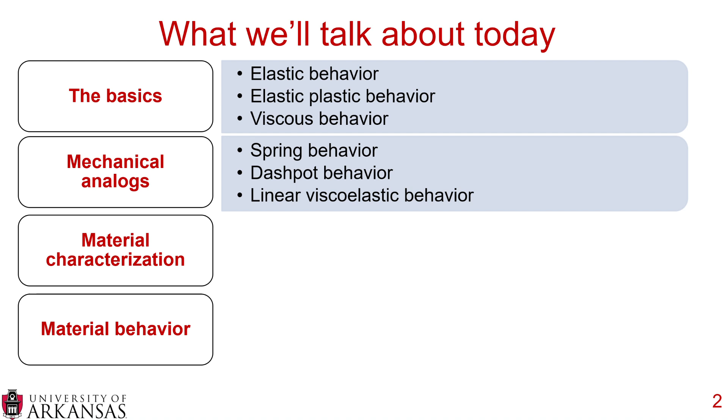My name is Andrew Bram, and today we'll be talking about viscoelasticity and asphalt materials. We're going to start with some basics, including elastic behavior, elastic plastic behavior, and viscous behavior. We're then going to transition into spring behavior and dashpot behavior, which are mechanical analogues, and we'll combine various springs and dashpots to explore linear viscoelastic behavior.

Now, this topic can easily be a 2 to 3 day workshop, and this will be a long Pavinar. Usually these are about 30 to 40 minutes. I anticipate this one being 50 to 60 minutes, but I'm only going to scratch the surface, so I will provide some additional materials at the end, but I'm just going to cover the basics in this Pavinar.

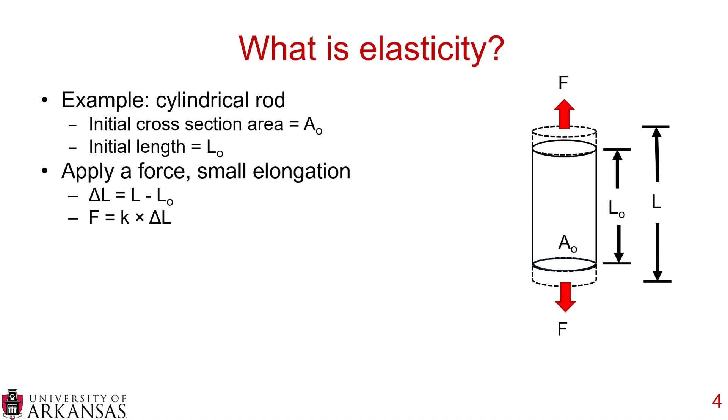Then let's apply a force, and we get a small elongation. So we get a delta L, which is L minus L0, and the force we applied is K times delta L. That K is a function of material and geometry, specifically the modulus of elasticity. So we can substitute into K E times A0, so we have the force equaling E, the modulus of elasticity, times A0 times delta L over L0.

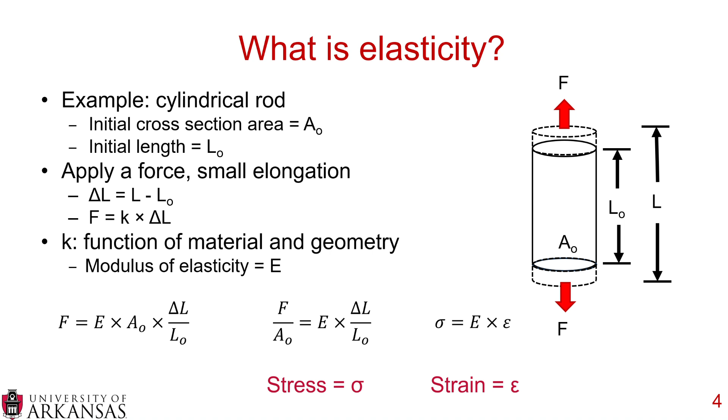And we can rearrange that equation. We can take the area over to the left side, and then you can clearly see where the stress equals E times the strain, where sigma equals E times epsilon. So this is a fundamental elasticity theory.

Now we can also take a look at it in graphs. A linear elastic material is where you load something with some sort of stress. You measure the strain. When you unload it, it returns on the same path in a linear fashion. So you can just go back and forth, up and down. That's a linear elastic material.

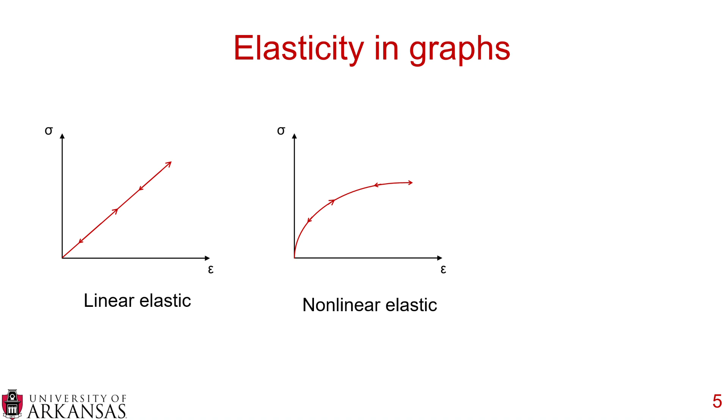You have nonlinear elastic materials where, again, you apply some sort of stress and you measure a strain. It tracks on the same path going up and down, but it's not a straight line. So it's a nonlinear elastic material.

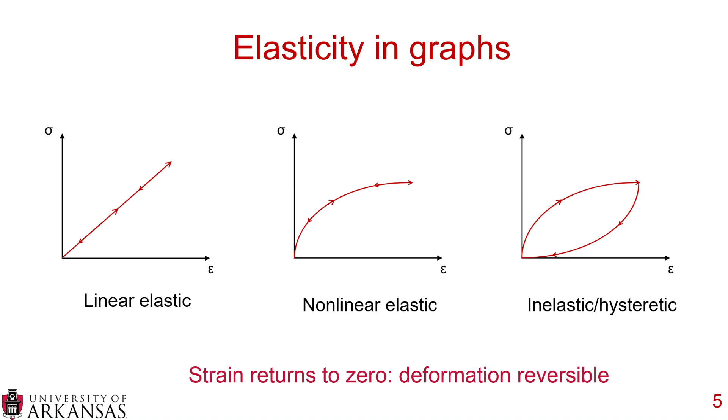And then we have a concept called inelastic or hysteresis, where you load it on one path, it unloads on the other path. But the most important thing to notice here, in elasticity, the strain always returns to zero. Any sort of deformation that you put on the sample goes back after you've taken the load off. So all of the strains start at zero, and they all return to zero at the end.

Now, when we incorporate plasticity into this, this means we apply some sort of strain, but then it does not return to zero. So you have a perfectly plastic material where it returns back to a stress of zero along the same slope as the loading that was applied. Or you have something called strain hardening, where there's some sort of kink in that loading cycle, but then again, you return back at the same slope, but there is some sort of permanent strain. And so here with an elastic plastic material, you introduce some deformation, and that deformation is irreversible.

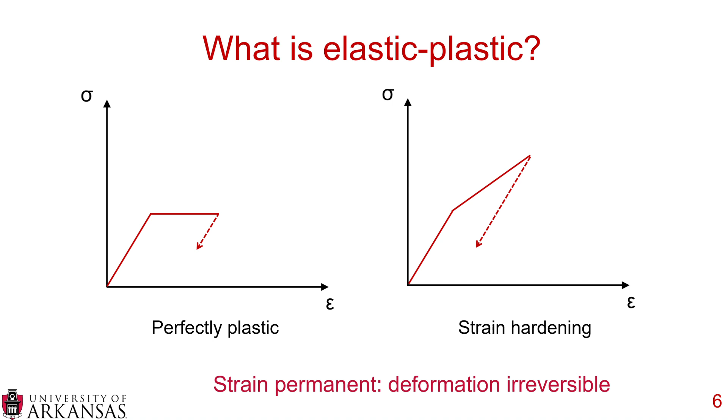Now with viscosity, the easiest way to quantify it is to pretend you have two parallel plates, and between those plates you have a purely viscous fluid. The plates have an area of small a, and you apply a force so the top plate moves at a constant velocity. That velocity is represented here, zero at the bottom and maximum at the top, showing a linear relationship in this viscous fluid.

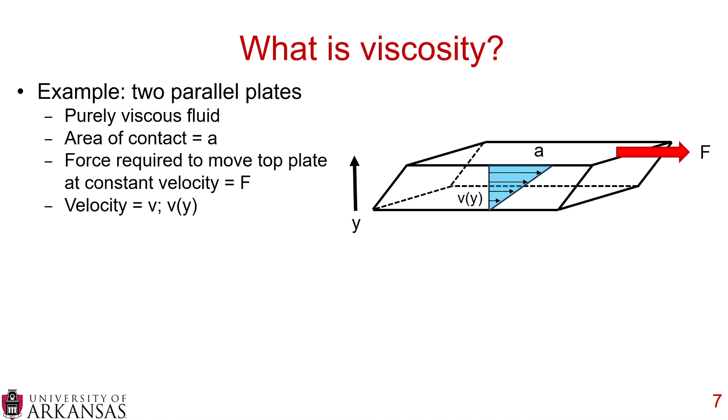There is a coefficient of shear viscosity, eta, and the force equals eta times A times the change in velocity over the change in height. That's a fundamental principle correlating the deformation to the force.

The strain rate is epsilon dot, which is d epsilon over dt, and that equals dv over dy. So you can replace that into our equation and divide by A: F divided by A equals eta times dv over dy. Substituting in epsilon dot, you get stress equals the coefficient of shear viscosity times epsilon dot. So that's how we get the equations behind viscosity.

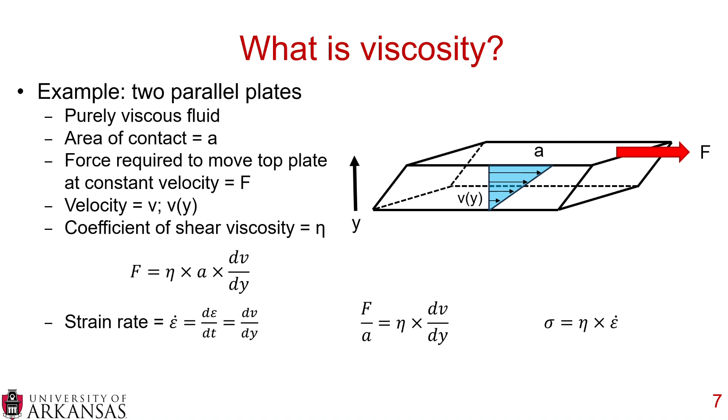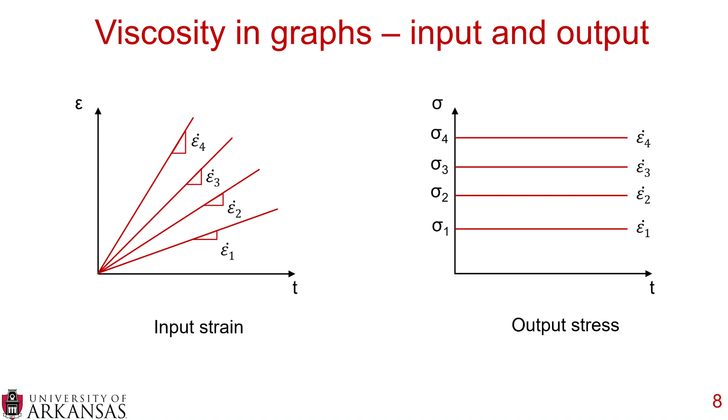Now let's take a look at that in graphical form. Pretend you have 4 different input strains, epsilon 1 through epsilon 4, or epsilon dot 1 through epsilon dot 4. From those 4 strains you get 4 different stresses, so you have an input strain and an output stress. You can cross plot the stress and the strain, with stress on the y-axis and strain on the x-axis, and you can see the 4 levels of stress corresponding to the 4 levels of strain.

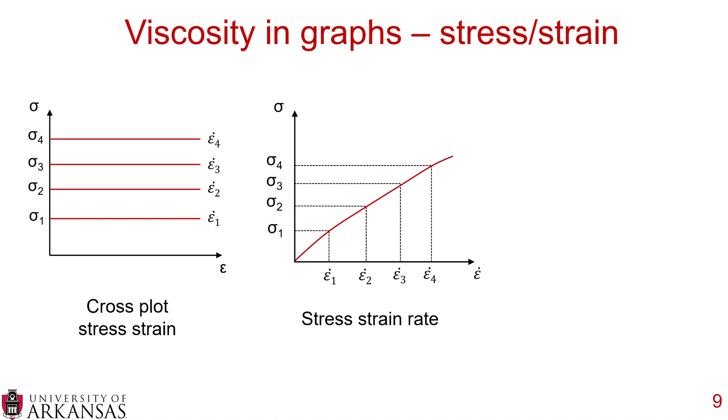Then you can plot the stress by the strain rate, epsilon dot, on the x-axis. You can see this happens to be a non-linear example: as the stress increases, the change in stress decreases, so it's nonlinear. But there is a special situation where if you have a linear relationship, meaning your eta is constant, this is what we call Newtonian behavior.

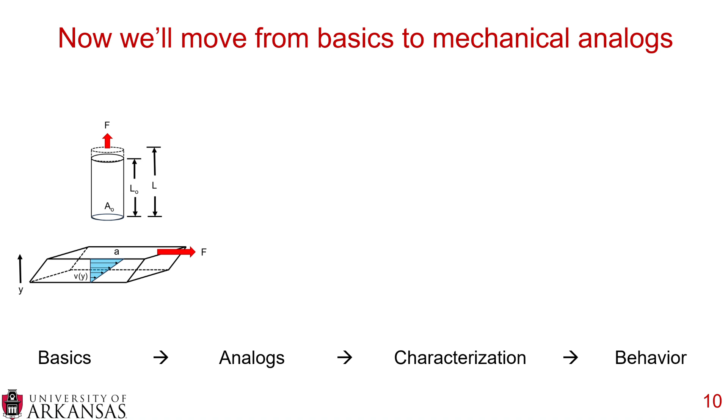So that is the basics of elasticity, elastic plastic behavior, and viscosity. Let's start taking a look at the mechanical analogues. We're going to look at creep versus relaxation, springs and dashpots, and then go into linear viscoelasticity.

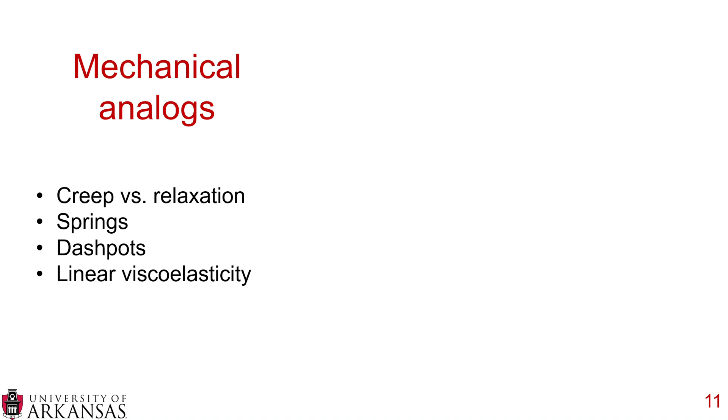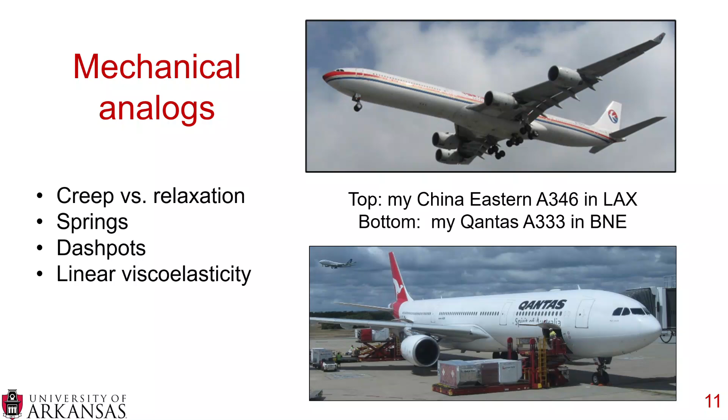Now back to the mechanical analogues, let's talk about creep versus relaxation, and we'll go into springs and dashpots and finish up with linear viscoelasticity.

When we think about a creep test, you have a constant stress and you measure the strain. This is called stress control. Over time, you apply some constant stress and see what happens to your material. In viscoelasticity, we relate this with creep compliance, which is the change in strain over time divided by that initial stress. You apply an initial stress, your strain starts increasing, and it's asymptotical, approaching a maximum value.

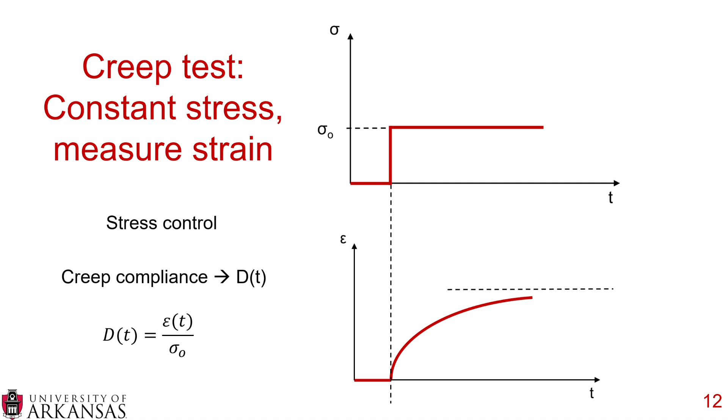So this is the creep test: constant stress, measure strain. The relaxation test, on the other hand, is a constant strain, and you measure the stress. This is called strain control. You apply a constant strain to your sample, then measure the stress. This is related to relaxation modulus, or E of T, which is the stress over time divided by that initial strain. When you apply that strain, there's a jump in stress, and as you continue applying the strain at a constant rate, the stress relaxes, hence why it's called a relaxation modulus.

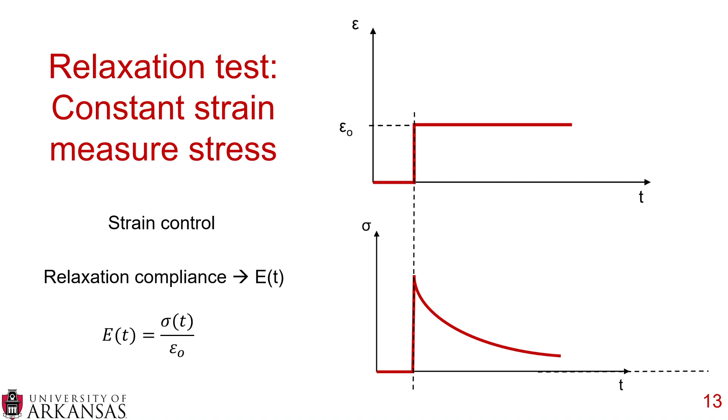Now, if you know about viscoelasticity, you also know it's often represented with mechanical analogues. Let's look at these concepts through that lens, starting with the spring. A single spring has some elastic modulus, which can be either in pounds per square inch or newtons per square meter.

In creep and recovery tests, you apply some sort of constant stress, and then you take that stress off. You measure the resulting strain, and when you take the stress off, the strain returns back to zero. So with a spring, the two curves look the same when we're talking about creep and recovery.

For relaxation, it's a little different. You apply some sort of constant strain, and the resulting stress is also constant. So there's a fundamental difference between creep and relaxation. With creep, you apply a stress, measure the strain, and when the stress is released, the strain goes to zero. But in relaxation, applying a constant strain results in a constant stress being recorded. This is a spring mechanical analog.

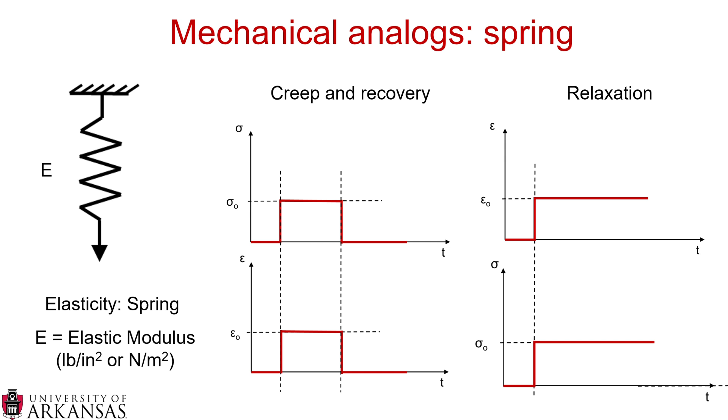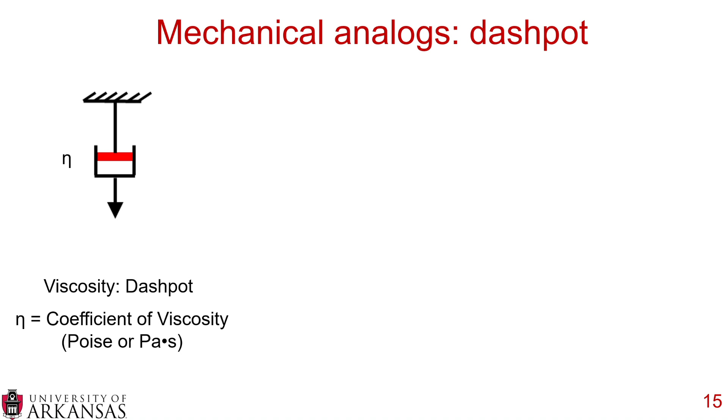The next most common is a dashpot mechanical analog, and this measures the viscosity of a material, represented by eta, the coefficient of viscosity, measured in poise or Pascal seconds. So again, let's pretend we do a creep and recovery test. You put some sort of constant stress on, apply it for a certain amount of time, and then release it back to zero.

Well, the strain looks a little different. You can see that the increase in strain is simply the applied stress divided by eta, but then when you remove the stress, the strain stays on, so it does not decrease again.

With relaxation, you apply some sort of constant strain at some time, and it's a very interesting response. Essentially the stress goes to infinity immediately, but then immediately drops down to zero. So you've essentially maxed out that dashpot by putting the maximum stress on, and then no matter how much more strain you put on, your stress will be zero.

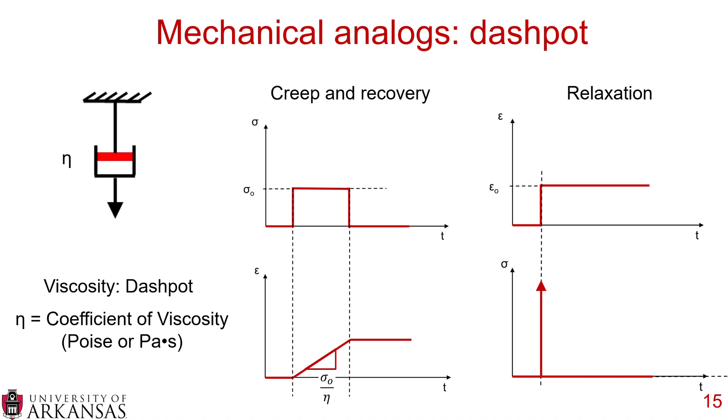Now it's not very convenient to have just a single spring or dashpot, so we put these together. For linear viscoelastic behavior, we have what's called the Maxwell model, where you have one spring and one dashpot in series. You either apply some sort of stress or some sort of strain.

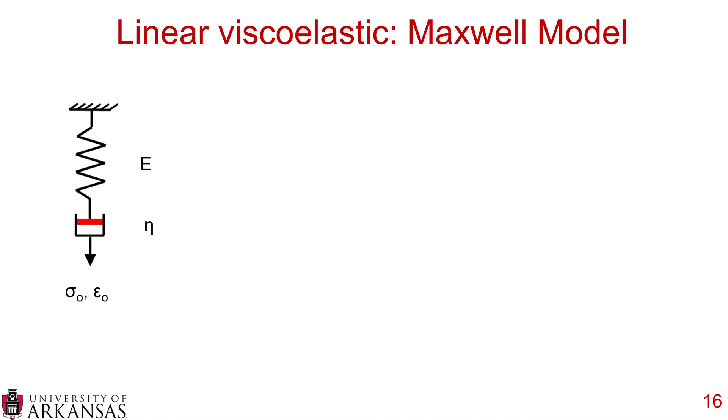So when we're looking at creep and recovery, you apply some sort of stress, and at T1 you remove that stress. The second you apply the stress, a deformation occurs, which is the stress divided by the modulus of elasticity. Then you have a slope increasing at 1 over eta, and when you remove the stress, it drops by that initial stress divided by the modulus of elasticity, but remains constant at T1 divided by eta times that initial stress. So the strain over time can be measured by the addition of those two components.

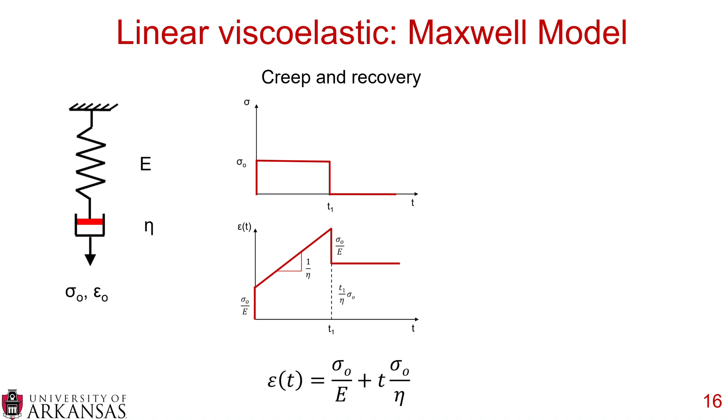Relaxation is obviously a little different. You apply some sort of constant strain. You have a jump up in stress, which is the modulus of elasticity times the initial strain, and then it decays over time. You can see the equation for how it decays: at the rate of eta times the strain rate times 1 minus e to the negative et divided by eta.

So we now have both visual and mathematical models for the Maxwell model. Now, the Maxwell model is a linear viscoelastic combination where the spring and dashpot are in series. We can also show them in parallel, and that's called the Voigt model.

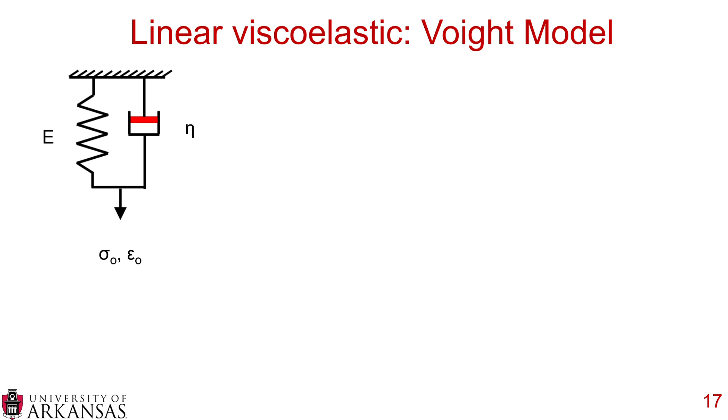Here again, you have some sort of elastic modulus and viscous dashpot, and you apply a stress or a strain to this model. Let's assume we put some sort of constant stress on the sample until T1, then remove that stress. There are two distinct different portions of this curve. Before T1, you can see the relationship of stress and strain, and this looks pretty similar to the Maxwell model in the relaxation component.

But afterwards, you can see its decaying relationship, and the strain is a function of the strain at T1, the elastic modulus, the change in time, and eta.

For the relaxation, you apply a consistent strain. It jumps up immediately, then immediately returns down to the modulus of elasticity times that initial strain, and then it stays constant as the strain is constant.

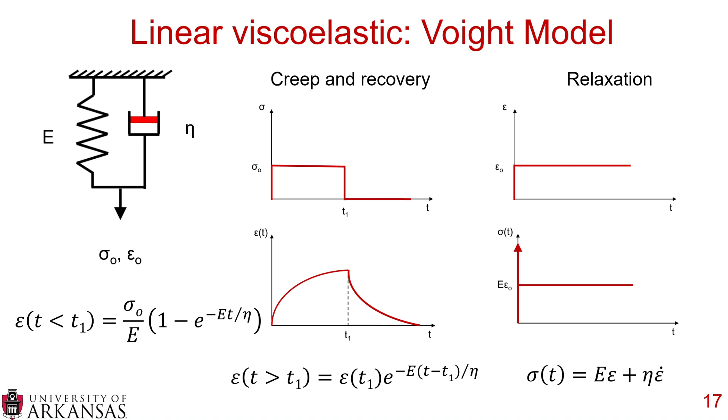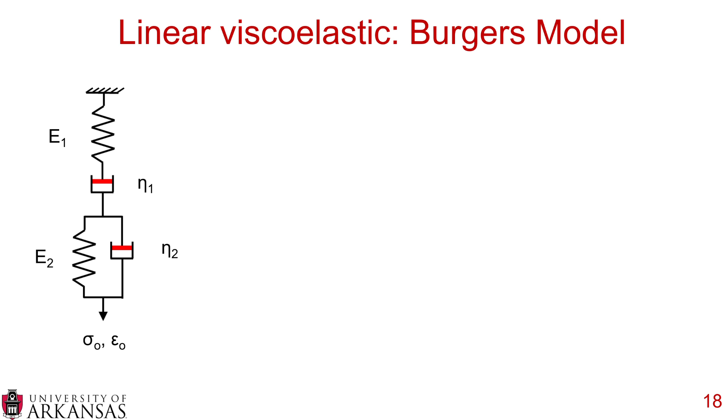We can continue building on this by putting the Maxwell and Voigt models in series, so now we have two springs and two dashpots. We apply our creep and recovery load, and you can see it becomes much more complex. There's some initial displacement, but the slope of the displacement is a function of not only the initial stress, but also the two modulus of elasticities of the two springs.

The recovery is similar, where you have a portion where it's that one spring releasing the E1, but then there's a decay with E2, and some permanent deformation because of that eta1 dashpot. With relaxation, you have a jump at the very beginning, which is the first spring's modulus of elasticity times the initial strain applied, and then it decays as shown in that curve.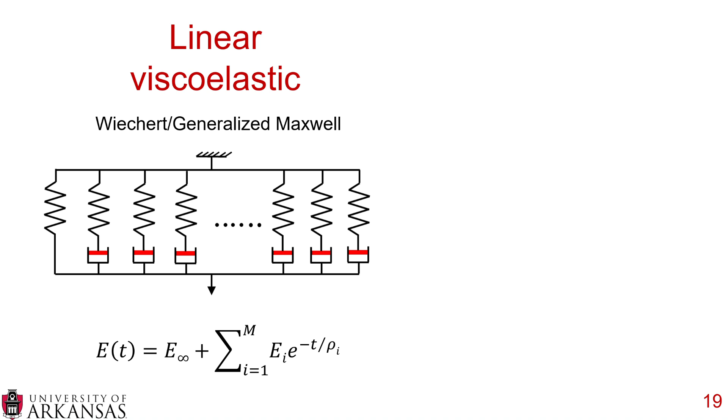So, linear viscoelasticity in summary, there are literally thousands of combinations of springs and dashpots, both in parallel and series. This is why a workshop on viscoelasticity could last 2 to 3 days, because there's much more we could talk about. I just wanted to lay down the foundation of different possibilities.

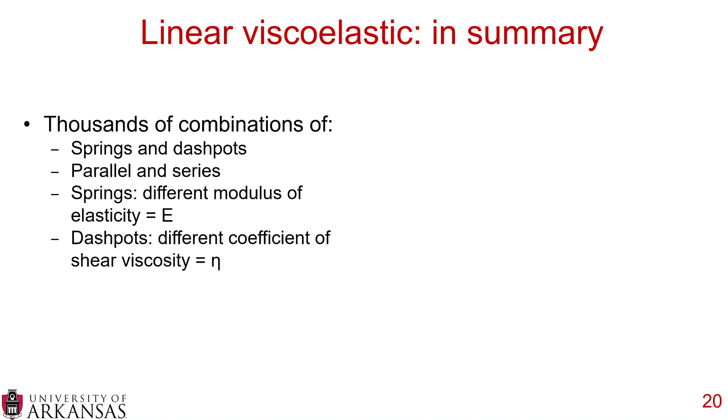At the end of the day, when we're looking at these springs and dashpots, the springs offer modulus of elasticity, or E. The dashpots offer the coefficient of shear viscosity, or eta. We're just trying to put these in series and parallel to represent what the viscoelastic material, in this case the asphalt mixture, is doing and how it's behaving.

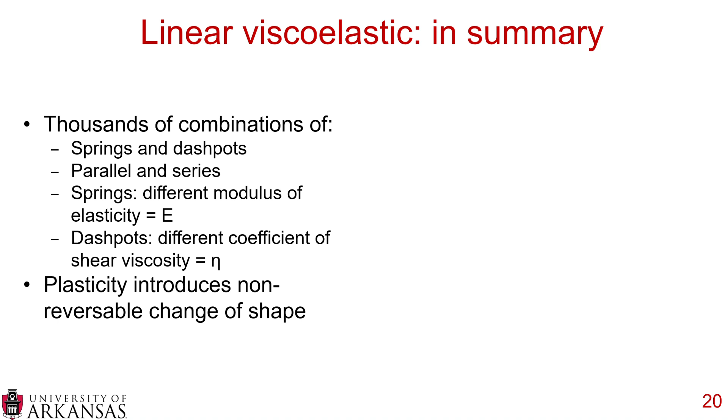Plasticity comes into play when you have a non-reversible change of shape. So putting it all together, if you apply some sort of stress to your material, this is everything put together. You can see we have strains from the viscoelastic and viscoplastic components. You have plastic strains, you have elastic strains. Those are all summed together to T1.

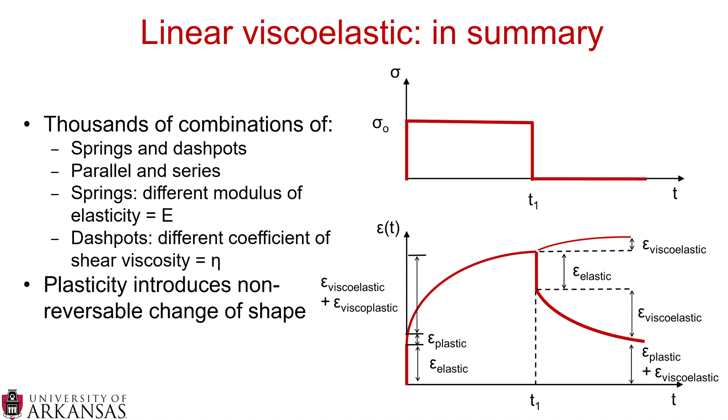Then at T1, you continue to have viscoelastic strain gain, but you also have a recoverable elastic strain, a recoverable viscoelastic strain, and some permanent plastic and viscoelastic strain as well. That graph on the lower right is really what we're doing with asphalt materials, trying to understand how those responses to applied stresses impact the material. That graph on the lower right-hand corner puts everything together.

All right, moving from mechanical analogues to material characterization, we're going to talk about 6 models. We'll start with the power laws, then the sigmoidal model, the SHRP model, move into the parabolic model, the Heut-Sayegh model, and then 2S, 2P, 1D.

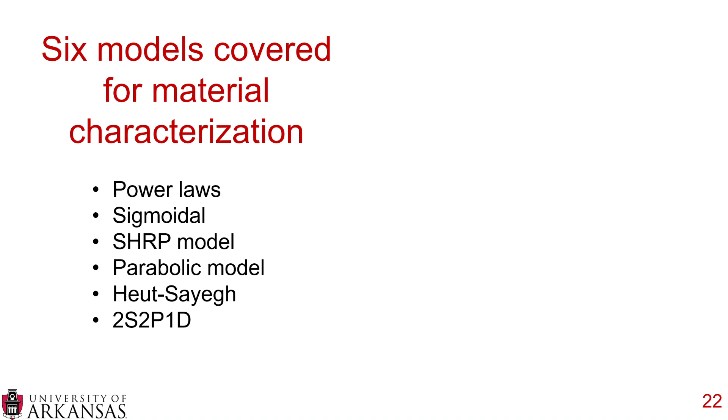Before we get into these models, as advertised, I've got a couple more airplanes for you. On top is a Delta Boeing 767-300 that I flew into Atlanta. And on bottom, I was very fortunate to fly an A310. Those are very difficult to fly these days, they're very rare passenger planes. This is a Korean Air plane in Seoul that I was able to fly.

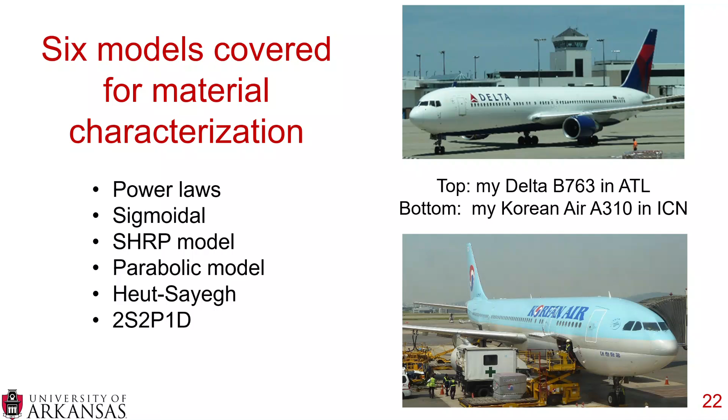But moving on, the next section will be power laws, the sigmoidal model, the SHRP model, parabolic model, Heut-Sayegh, and 2S, 2P, 1D. These are the 6 models that we'll talk about.

So in order to talk about these models, we're going to talk about the unit response function, or R sub H. The unit response function can be either creep compliance, D of T, where you apply a constant stress, or relaxation modulus, E of T, where you apply a constant strain. Something we use a lot in asphalt materials is the dynamic modulus, which is the stress divided by the strain, and you can see there's a phase angle involved as well.

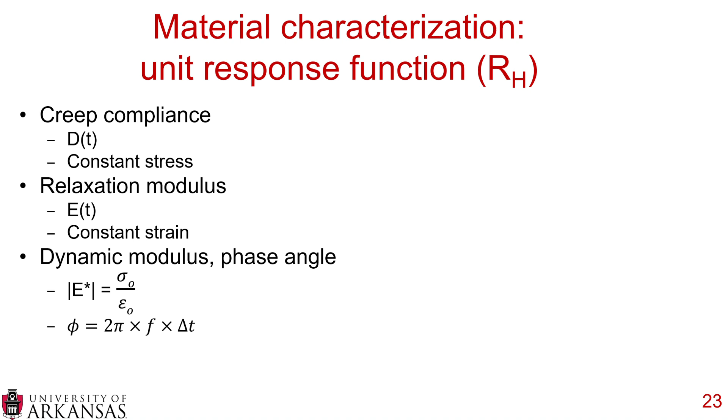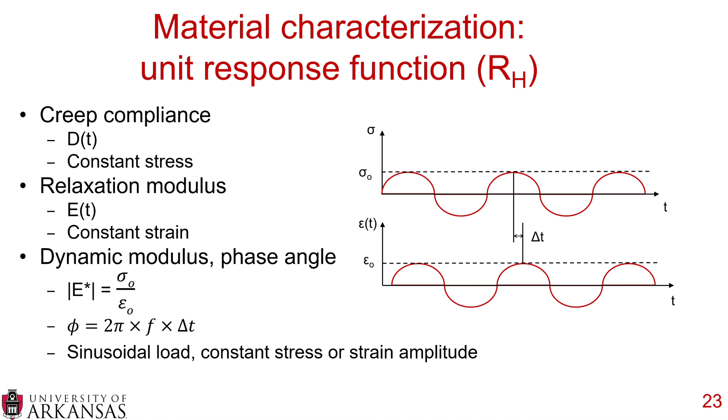If we look at the dynamic modulus, it's where we apply a sinusoidal load with a constant stress or strain amplitude, and those curves are shifted in some way. So you apply a stress and a strain results, but there's a shift to that, and that shift is delta T. This is a very common way to analyze asphalt materials, either with the creep compliance or the relaxation modulus, but by far the most popular is the dynamic modulus, which is E star.

So let's start out with some power law models. Let's look at E of T and D of T. If it's a pure power law, it's simply E of T equals E1 times T to the negative N. This is the most simple power law model that you can have.

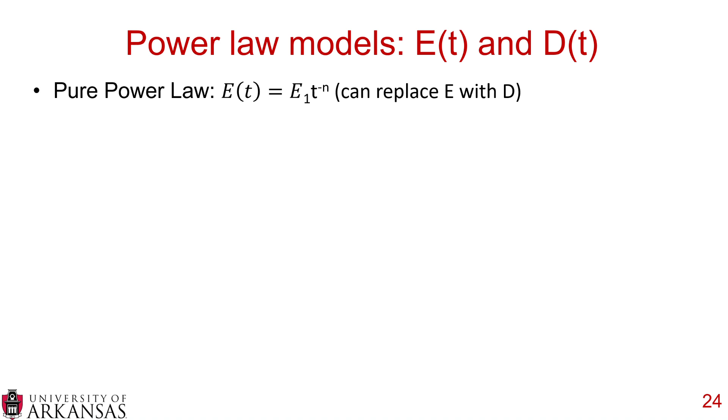In this equation, you can replace E with D. They're interchangeable, the same with the generalized power law. This is where you have some sort of initial relaxation or creep compliance. Again, you can replace D with E, but it's just that pure power law, and you add an initial either creep or relaxation.

Then we start getting to the modified power laws, and here we cannot simply replace them one for one. You can see here we have an initial and then some sort of additional either creep or relaxation, and they're functions of either lambda or the initial modulus. With the creep, the lambda is in the numerator. In the relaxation, the lambda is in the denominator. So you can see how those flip. And that's the modified power law.

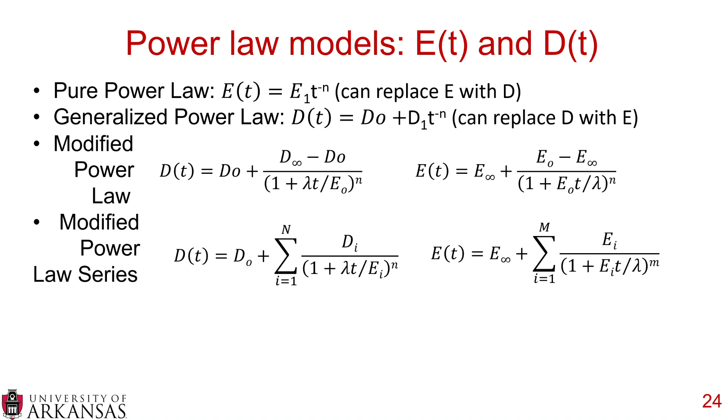With the modified power law series, this just introduces the concept that we have many different either creep or relaxation components, and we have to sum those together from either 1 to N for creep or 1 to M for relaxation. And then finally for the Prony series, this is again much more complicated, but again there's some sort of initial values and then summations following them.

For the modified power law series and the Prony series, E and D are not simply interchangeable. For the pure power law and the generalized power law, they are. But with these more complicated power law models, you do need to separate them and keep them separated, as essentially the E's, the moduli, and the lambdas flip in the equation.

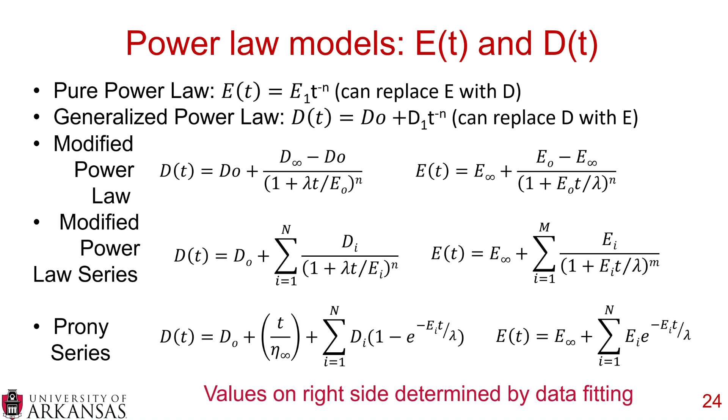Now, all those values on the far right side are essentially determined by data fitting. So you collect the raw data, and then you do some sort of either minimizing the sum of the squares or some sort of analysis in order to data fit and put an equation to the data that you had collected.

Now, I had mentioned before that dynamic modulus is one of the most popular, and this is a sigmoidal model. When we're looking at the sigmoidal model, you can see here where you have the log of the dynamic modulus is essentially an equation that's based on 4 fitting constants and a reduced frequency.

This is what's used to build what we call master curves, and I'll talk about that more later. If you look up AASHTO R84, that is the fundamental standard that we use in order to build our master curves. Again, you can see the log of the dynamic modulus is a value of b plus that maximum dynamic modulus minus b, divided by 1 plus e to the d plus g log of the reduced frequency.

Now, I'm not going to spend a whole lot of time on dynamic modulus, but I do have a webinar that was recorded on August 2nd, 2020, titled Correlating Field Performance to Laboratory Dynamic Modulus from Indirect Tension and Torsion Bar, and that paper is just as exciting as it sounds, let me tell you. But the webinar goes over really how we explored fitting these master curve construction techniques to the data that we collected. So there's a lot more information in there. I just wanted to bring it to your attention that you have a power law sigmoidal model and then a master curve construction sigmoidal model as well in order to get your dynamic modulus.

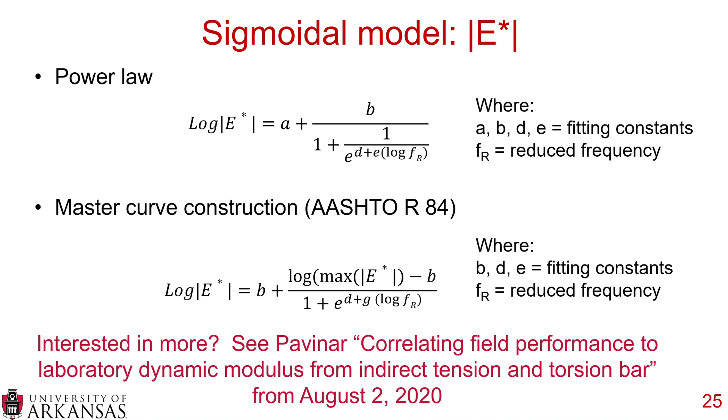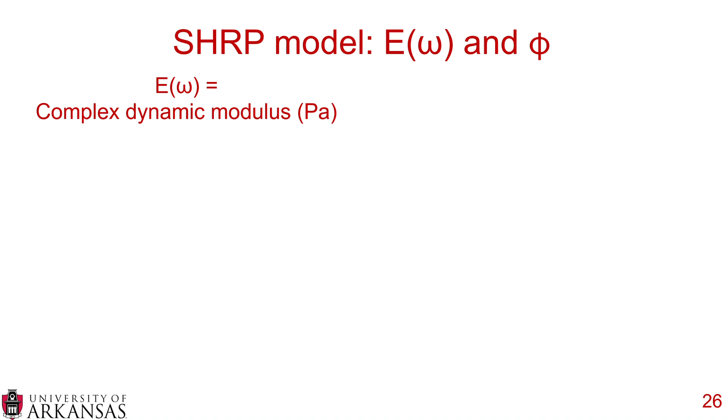So now looking at the SHRP model, here we have the E of omega, and that is the complex dynamic modulus in pascals. You can see E of omega is a function of the glassy modulus, so this is the modulus of asphalt materials below the glass transition point, so they're essentially purely elastic. That's a simplified way of explaining that. But you can see we've got our frequency and crossover frequency with the omega, and then you have your rheological index, which is capital R, and that's simply the log of the glassy modulus divided by the complex dynamic modulus that you are collecting.

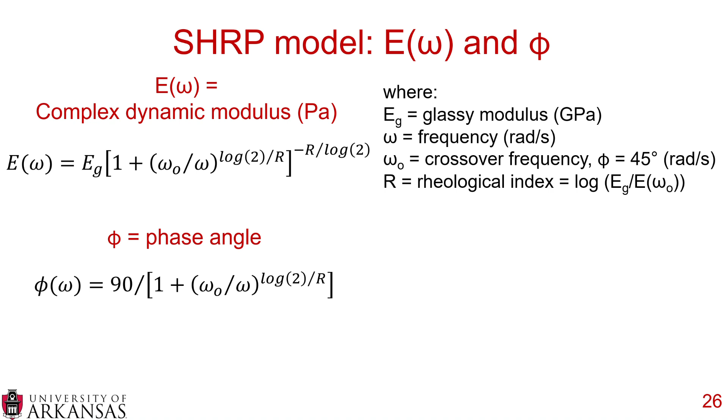If you're going to use the SHRP model to get this complex dynamic modulus, this is how you calculate the phase angle. So this is how you calculate that offset between the stresses and the strains.

And a graph that really helps me here is when we're thinking about the dynamic modulus, or the complex dynamic modulus, E of omega. You can see that E of omega is simply the resulting vector of the elastic portion of your material, which is E prime, and the viscous portion of your material, which is E double prime. So the viscous modulus and the elastic modulus, the resulting vector of those two values of the moduli are your complex dynamic modulus, and then the phase angle is simply the angle of that vector.

You can imagine having similar values of the complex dynamic modulus, but the quantity of the viscous and elastic modulus can change as that phase angle changes. I really like that graph because it breaks down the fundamental relationship between elastic modulus, viscous modulus, and the complex dynamic modulus.

If you want a little more reading, there have been several iterations on this SHRP model. It all started with Christensen and Anderson back in 1992. Man, back in 1992, I think I was a freshman in high school, which is kind of crazy.

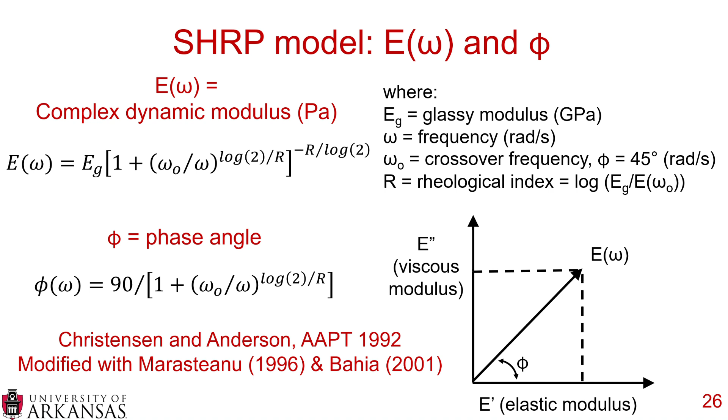Over the years, further AAPT articles—AAPT standing for the Association of Asphalt Paving Technologists—with Marasteanu in 1996 and Bahia in 2001 built on the SHRP model. This is what Christensen and Anderson presented in 1992, but it's been modified and enhanced by Marasteanu and Bahia based on polymer modification and other factors. I wanted to start with the foundational one, and the additional ones are modifications you're free to look into more.

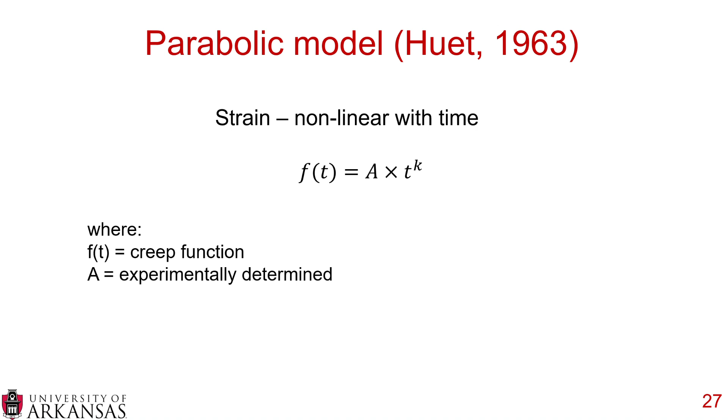The parabolic model was introduced by Huet in 1963—apologies if I'm mispronouncing that name—but essentially the strain is nonlinear with time. So you have some function that equals A, and that function is the creep function. A is experimentally determined, and the parabolic portion comes from T to the K, where T is time and K ranges from 0 to 1.

If it's a purely elastic system, or a spring, K equals 0. If it's a purely viscous system, K equals 1, meaning it's a dashpot. And like all good things in the world, no asphalt mixture is either K equals 0 or K equals 1—it's somewhere in between.

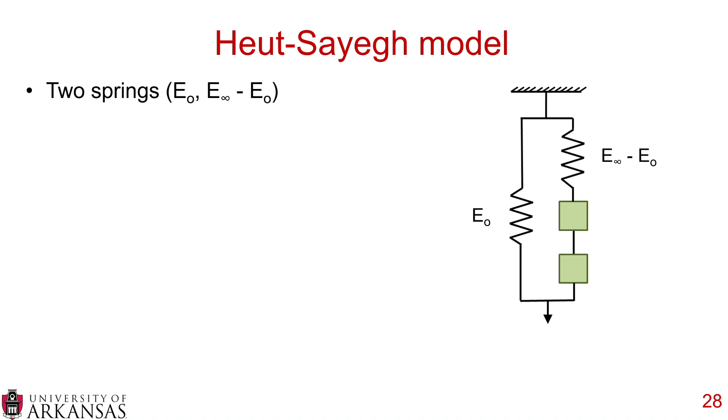This was improved on with the Huet-Sayegh model, where you have two springs: E naught, and the maximum value of E minus E naught. E naught is on the left, and the asymptotical maximum minus E naught is on the right. But then you also have two parabolic creep elements.

You have K and H, which are called parabolic dashpots. In the equation, your E star is the E naught, that spring on the left, but then you have the spring in the numerator on the second portion of the equation. The K and H are introduced in the denominator.

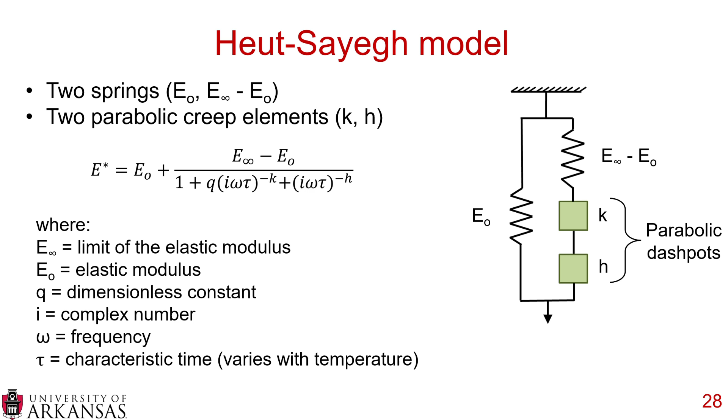E infinity is the limit of the elastic modulus, E naught is the elastic modulus, and then you have a dimensionless constant, Q. You have the complex number I, a frequency represented by omega, and something called characteristic time, tau, which varies with temperature.

This was built on again by the 2S2P1D model, rolled out by Hervé di Benedetto, building on the Huet-Sayegh model. Everything is the same except you have an additional dashpot, in the lower right-hand corner of the model, and that value of eta is what causes the 2S2P1D designation.

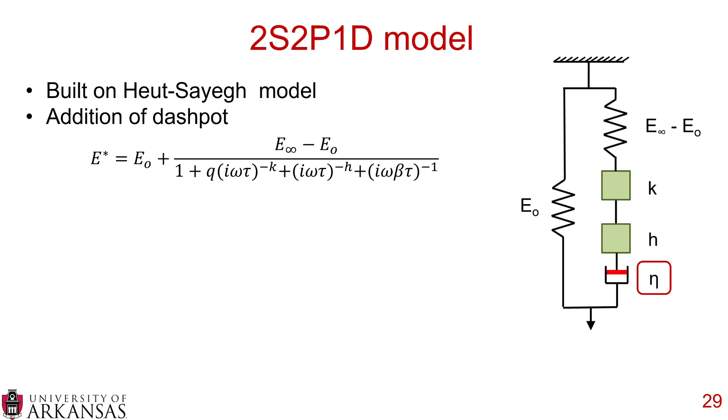You probably noticed that 2S stands for two springs, 2P stands for two parabolic elements, and 1D is one dashpot. The denominator is very similar to the Huet-Sayegh model, but you also have that dashpot in the denominator, which is I omega beta tau to the negative 1.

E infinity is the limit of the elastic modulus, E naught is the elastic modulus, Q is a dimensionless constant—all the same. I is the complex number, omega is the frequency, tau is the characteristic time—all the same as the Huet-Sayegh model. But we also have eta, the Newtonian viscosity, which is E infinity minus E naught times beta tau. That's the addition in the 2S2P1D model.

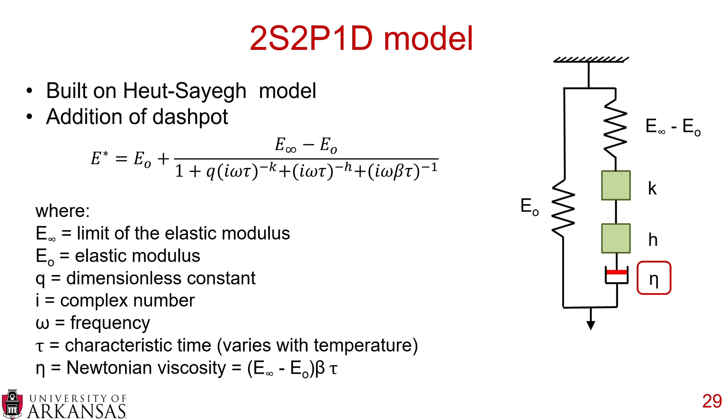Now that we've talked about material characterization, let's talk about material behavior. There are four concepts I want to cover. The first is relaxation and creep compliance, which we've touched on but I want to go into more detail. The second is the convolution integral, which plays directly into relaxation and creep compliance. Then we'll talk about the correspondence principle, which is very important. And then one of my favorite parts of asphalt materials, time-temperature superposition—I just think that is such a cool impact.

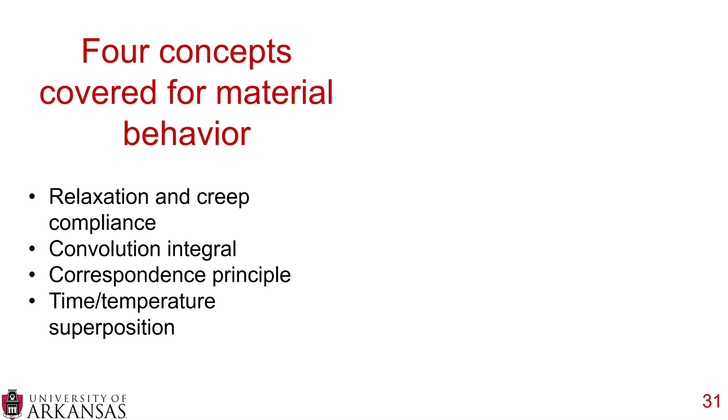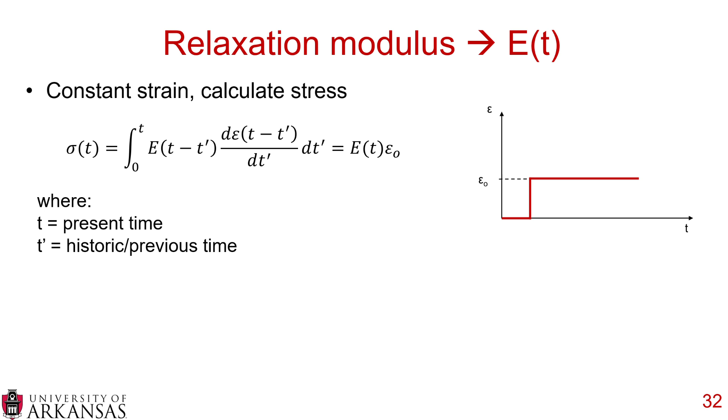So for the relaxation modulus, this is E of T, a constant strain, and you calculate the stress. And this is the equation you have: sigma T is the integral from 0 to T of E(T minus T prime) times D epsilon(T minus T prime) over D T prime, times D T prime. And all of that equals E of T times epsilon naught. Here T is the present time and T prime is the historic or previous time.

And when we talk about convolution integrals, that is this portion of the relaxation modulus equation. So looking at that integral, that is what we refer to as the convolution integral.

Now, why is this important? Well, let's look at an example of a Maxwell model. If we have a Maxwell model, we have a spring and a dashpot in series, and E is the elastic coefficient of the spring, lambda is the viscosity of the dashpot, and tau is lambda divided by E. When we look at this, our equation is E of t equals E times e to the negative t over tau.

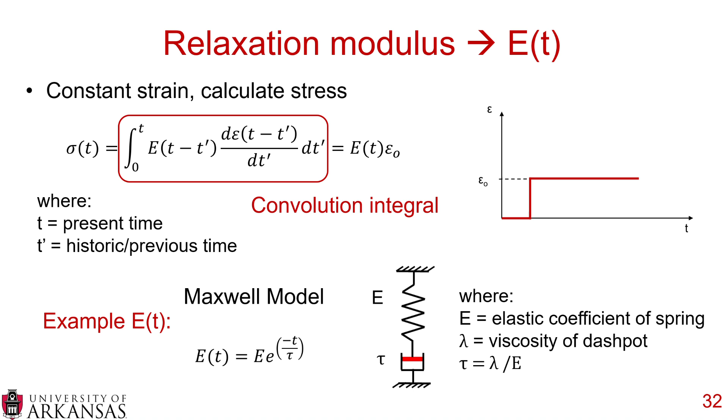So this is an example of how we use the relaxation modulus with one of the more basic models. And you can imagine, just like we had all the different mechanical models, all the different forms of springs and dashpots, you can develop these relaxation modulus equations for any sort of array of spring and dashpots. So it's a very, very powerful tool. I just wanted to show one simple example for demonstration's sake.

Now looking at creep compliance, here again you have a constant stress and you calculate the strain. A very similar equation, but it's where the strain is a function of time, and you can see again another convolution integral, but we have creep compliance instead of relaxation within the integral. So this too is called the convolution integral. The convolution integral occurs in both relaxation and creep compliance.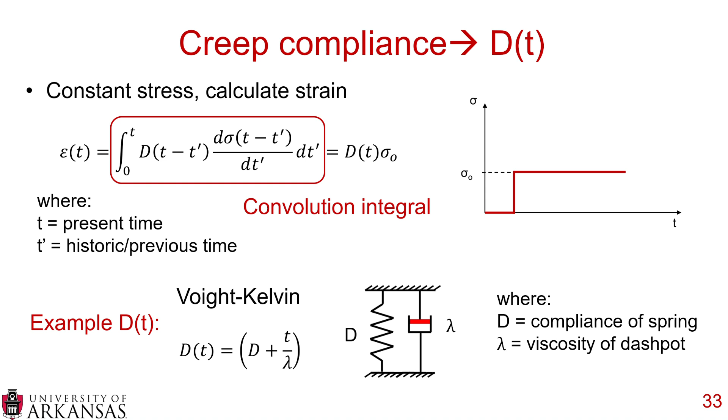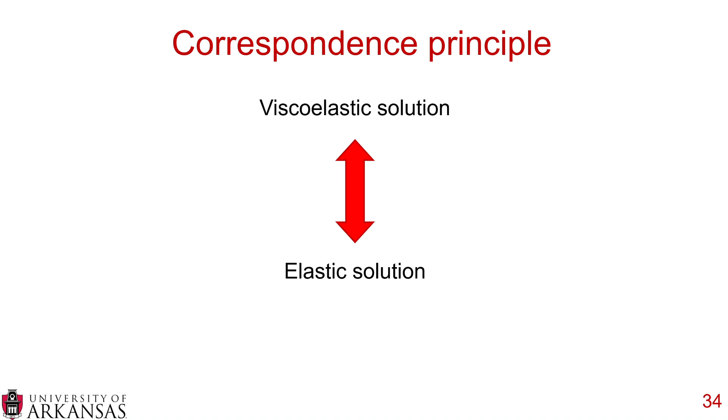Now, we've been talking a lot about viscoelastic solutions, but let's talk about the correspondence principle, because at the end of the day, viscoelastic solutions are difficult. So it's beneficial to solve for elastic solutions and then transfer them to a viscoelastic solution. Why? It's because elastic solutions are easier, and I don't know about you, but I prefer easy. Viscoelasticity is hard. So is there a way that we can use elastic solutions in order to solve viscoelastic problems?

Yes, there is, and that is called the correspondence principle. How do we do that? We use the Laplace transform. For any time-dependent function, this is your Laplace transform: you take the integral from 0 to infinity of that function times e to the negative st dt, and then you get your Laplace transform, your f bar s. And s is the Laplace transform parameter, and it is a positive real constant.

Actually, in preparation for Dr. Kim's viscoelasticity workshop, I spent a lot of time online trying to learn more about the Laplace transform, trying to get more familiar with it, so I wasn't relearning as I went along. There's a lot of great information out there, folks. This is just scratching the surface, but it's very easy, for example, to find example functions.

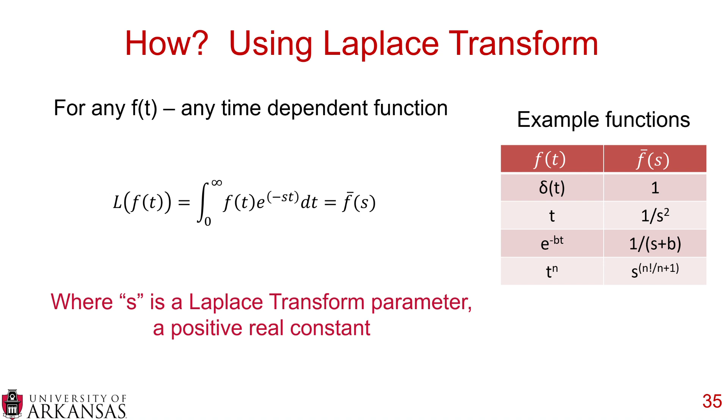So the initial time-dependent function, ft, and then the Laplace function on the right. You can see for any sort of function, delta of t, the Laplace transform is 1. If it's just t, it's 1 over s squared. E to the negative bt is 1 over s plus b, and then t to the n is n factorial divided by s to the n plus 1.

Now, it is important to note when we're interconverting between the relaxation modulus and the creep compliance, it is not simply an inverse relationship. That's because in relaxation, the resulting stress is a function of time, while in creep, the resulting strain is a function of time. Because the time dependency is different in these two ideas, you can't just simply take the inverse.

But one of the powers of the Laplace transform is you can take the inverse and multiply it by s squared in the Laplace transform space. This is where the power of the Laplace transform and the correspondence principle comes into play: you can convert directly between the relaxation modulus and the creep compliance, but it has to be in the Laplace domain.

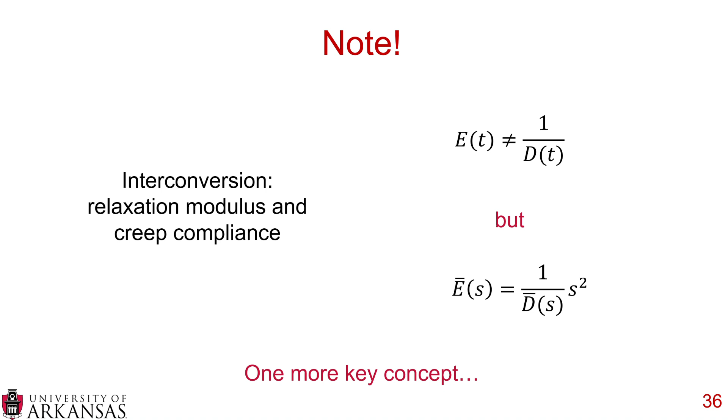All right, one more key concept that I want to cover. If you recall back to the beginning of this recording, this is actually one of my favorite concepts, and that's time-temperature superposition. I love working in the lab. One of the reasons I struggle with viscoelastic theory is that once you get beyond the springs and dashpots, it's hard for me to visualize, hard for me to wrap my head around some of these concepts. That's why I like material testing, because you actually have a physical material and you're doing something to it.

In the lab, you have both equipment and testing limitations. If you have a really, really nice environmental chamber, generally that means you're going from about negative 40 degrees Fahrenheit to about positive 70 degrees Fahrenheit. Not to mention, once you get above 70 degrees Fahrenheit, it's difficult to maintain the integrity of your samples if you're using asphalt mixtures.

Again, equipment limitations: loading frequency. This is how quickly you apply a load to a sample. Generally, our lab equipment can go from 0.01 Hertz all the way up to 25 Hertz. But really anything beyond there, you need very, very, very highly specialized equipment.

In fact, if you ever have the chance to go to NC State to visit their lab, which I encourage that you do, they have a Bose load frame which uses speakers and sound in order to get higher frequencies, which is really cool, but we don't have one of those here in Arkansas.

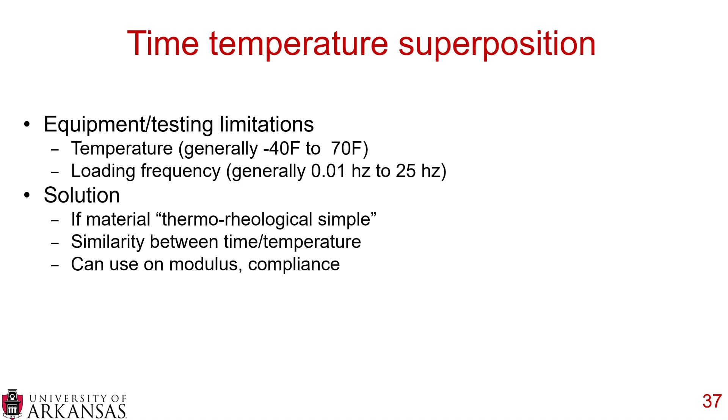So what's the solution to these limitations? Well, if a material is thermorheologically simple, which asphalt materials are, that means there's a similarity between time and temperature, and you can use this similarity on both modulus and compliance.

I mentioned dynamic modulus before, and if you look at AASHTO R62, this is the standard practice for developing dynamic modulus master curves for asphalt mixtures. Basically what you're doing is applying an axial load in the configuration shown, and measuring an axial strain. You are constrained in the lab by temperature and loading frequency.

This specific piece of equipment, which is in the lab here at the University of Arkansas, only goes down to about negative 12 degrees Fahrenheit and only goes up to about 60 degrees Fahrenheit, so it's an even narrower range than the temperature I listed here. But go up to the University of Illinois, and the testing chamber they have there can actually get down to minus 40 if you need it to. It just depends on where you are and what capabilities you have.

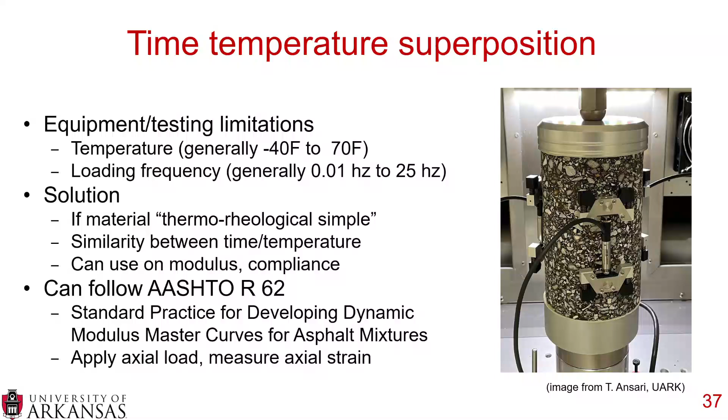But what is this time-temperature superposition, and how does it work? Well, if we're constrained by this 0.01 Hertz to 25 Hertz range, and we're constrained by temperature, this is what we do: we run multiple tests at multiple temperatures.

So we put our sample in the environmental chamber at minus 10 degrees Celsius, and we run the dynamic modulus from 0.1 Hertz all the way up to 25 Hertz. With that same sample, we heat it up to 21 degrees Celsius, and we run it from 0.1 to 25 Hertz.

With that same sample, we heat it up to T2, 54 degrees Celsius, and run it at 0.1 to 25 Hertz. So here, our equipment is constrained by 0.1 to 25 Hertz, and all we can do is change the temperature, from negative 10 up to positive 54. What's happening here is you can see that the colder temperatures, the ones on top, are a stiffer mixture, and we can measure that stiffness at these three different temperatures across the frequency range of 0.1 to 25 Hertz.

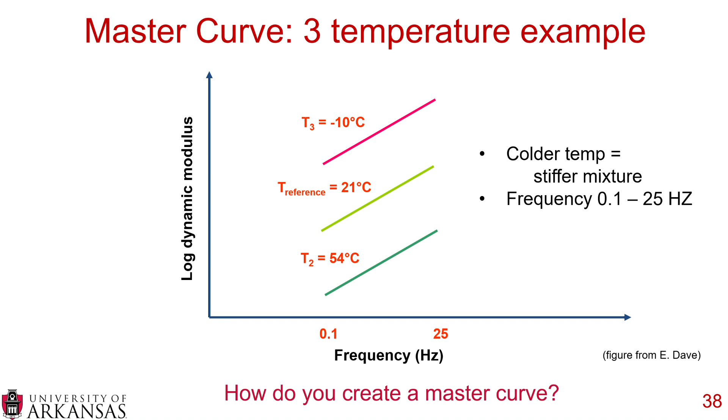And so what we did now is we got a much larger range of frequencies. So you can do much faster loads going over, interstate type loads. You can go much slower loads going over, parking lot loads. This really allows us to explore a much wider range of frequencies by simply using time temperature superposition. And this shifted continuous curve is known as a master curve.

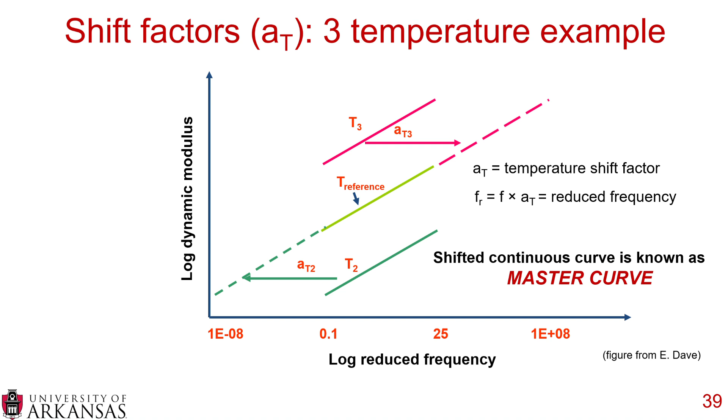Now, how do you calculate this master curve? Well, one example is a sigmoidal function. So this is an AASHTO R62, but you can see that you have a dynamic modulus, the log of the dynamic modulus, and that equals various fitting parameters and the reduced frequency. This is just one example. This is in the standard, so this is kind of the default go-to. There are other ways to do it as well.

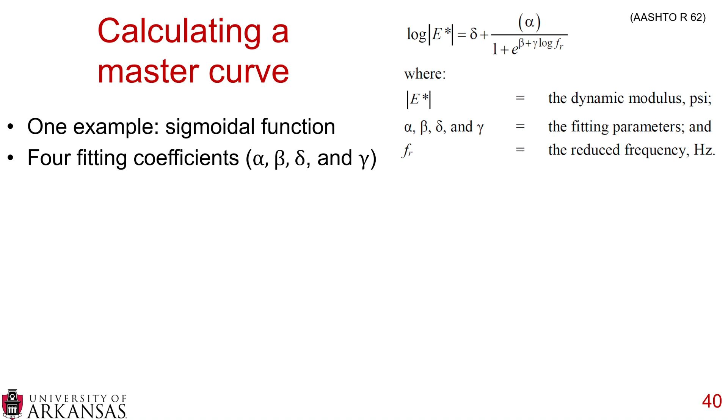But it's important to note that you have 4 fitting coefficients, and so what you need to do is you need to shift the data, and you can do that either by WLF or the Arrhenius or other various methods. But you can see here the original data, the -10 is on the far right, the +54 is on the far left, and we shifted that data to various reduced frequencies, and then we put a fitting parameter to it. And that's that solid red line, which is the master curve.

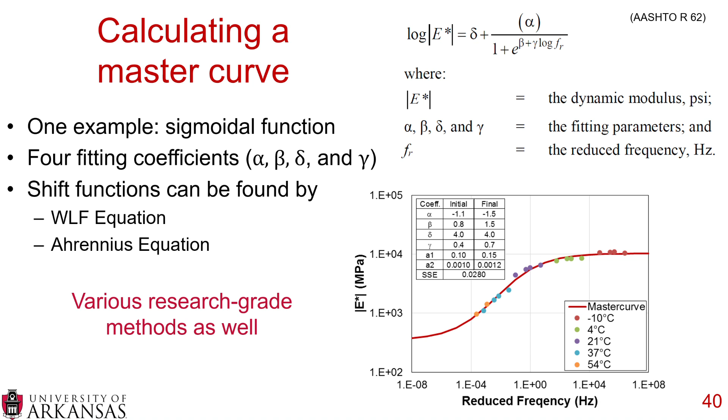And you can see the various coefficient values and the sum of squared errors. So you want to minimize that. We usually use Microsoft Excel Solver to minimize that, but it's a very powerful tool in asphalt materials. In addition to these very basic calculations of a master curve, there are various research grade methods as well. Again, that could take 2-3 hours to cover all of those and the ins and outs and the details of each one.

So I went over a lot of material. If you are interested in further learning, I do encourage you, if you ever have the chance, to go to Dr. Kim's workshop, the Viscoelastic Continuum Damage Model of Asphalt Mixtures and its Applications. Great 2-day workshop. I learned a ton, took a lot of notes, and it was a very, very good experience. He was also the editor of a book called Modeling of Asphalt Concrete that was put out by ASCE Press. It's a little older, it's in 2009, but it's still got a lot of good foundational information in it. A lot of the material that's covered in that workshop is also in that textbook.

Then we have Yusoff, Shaw and Airey. They put together a very nice literature review of the modeling the linear viscoelastic rheological properties of bituminous binders. That's in Construction and Building Materials back in 2011. Great document, goes into fantastic details. I use that quite a bit. And then there's also a very nice book, Applications of Viscoelasticity by Hajikarimi and Nejad. And chapter 3 specifically goes into the models, but the title of the book is Applications of Viscoelasticity, Bituminous Materials, Characterization, and Modeling. And this was put out in 2021.

I'm going to sound like a broken record. There's a lot more out there, folks. Lots and lots of information. This is just intended to give you a very broad overview, a big introduction, and I really do apologize if I missed something. If I did miss anything, please email me, afbram@uark.edu. Give me some resources.